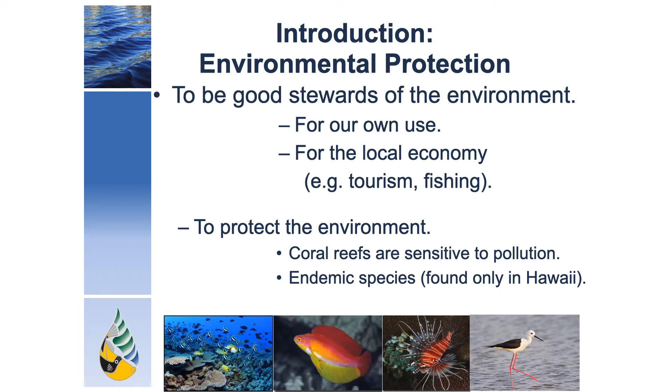Thank you for participating in this training presentation on the State of Hawaii Department of Transportation, Harbors Division, Environmental Construction and Post-Construction Programs. It is important for all of us to ensure best management practices are properly implemented to minimize potential pollutants generated during construction and post-construction activities and prevent them from entering our state waters. Our goal as good stewards is to ensure that our coastal waters are clean for everyone to enjoy. Clean water is of vital importance for our own use as well as to the fishing and tourism industries. Further, it is our responsibility to protect our wildlife, including many species only found here in Hawaii.

Back in November of 2014, the Hawaii Department of Transportation entered into a second consent decree with the Department of Justice, United States Environmental Protection Agency (EPA), and the Hawaii Department of Health due to alleged violations of the Clean Water Act at Honolulu Harbor and Kalaeloa Barbers Point Harbor. Under the consent decree, Harbors Division was required to implement various measures to improve the management of stormwater runoff. In doing so, Harbors created environmental policies and further enhanced their stormwater management program, which is driven by the issued National Pollutant Discharge Elimination System (NPDES) permits.

The Clean Water Act was established in 1972 to create a basic structure for regulating pollutant discharges into waters of the United States. This act gave the EPA the authority to implement pollution control programs, making it unlawful to discharge any pollutants from point sources into navigable waters unless a permit is obtained.

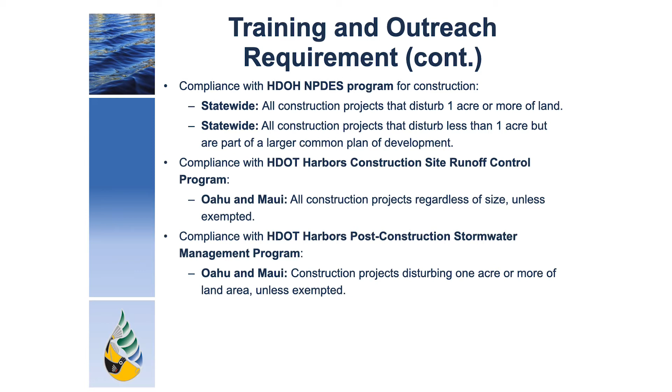This presentation will cover the information necessary to comply with these 3 programs. Outreach to construction contractors and consultants is provided by Harbor's Environmental Section through coordination with the Harbor's project managers, project engineers, or construction engineer as needed.

3 types of informational exchange sessions may be utilized as needed, which include pre-bid meetings, pre-construction meetings, and additional informational exchanges.

Harbors defines construction activities as any activity that disturbs land, which includes but is not limited to clearing, grading, and excavation. The definition of construction activities also includes construction support activities, such as stockpiles, borrow areas, and staging sites.

Land disturbance means the penetration, turning, moving of soil or the resurfacing of pavement with exposure to the base course. This may include construction roads, staging areas, stockpiles, grading, grubbing, and demolition. Please note that this does not include grass cutting or tree trimming.

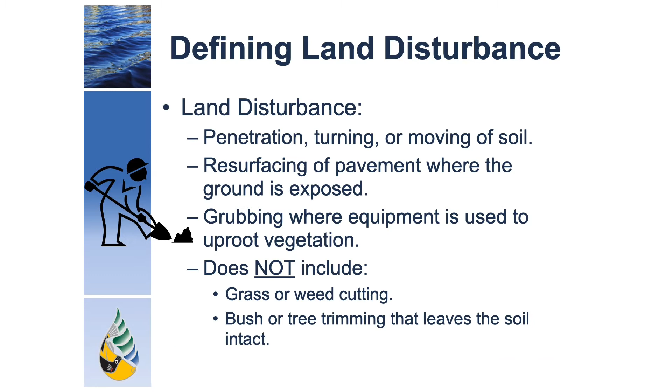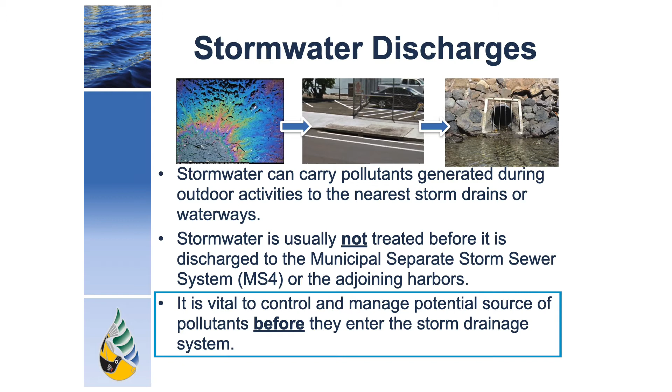How exactly can construction activities potentially impact the environment? Impacts can occur when stormwater runoff carries pollutants from construction sites to nearby storm drains or waterways. Once stormwater has entered the storm drain system, it flows and discharges directly to the adjoining harbors. Thus, it is essential to control and manage potential sources of pollutants before they enter the storm drainage system.

What exactly is an MS4? An MS4 is a system of conveyances that is designed or used for collecting or transporting stormwater and eventually discharges to surface waters. This may include storm drain inlets, manholes, canals, ditches, and outfalls. In Hawaii, anything that enters the MS4 eventually makes its way to our oceans.

It's important to remember that an MS4 is not a combined sewer, which means any pollutants that enter the MS4 are discharged directly to our oceans without prior treatment.

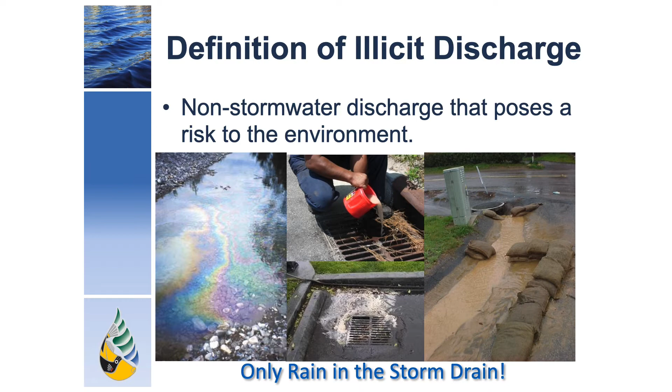One potential source of pollutants is from what is called an illicit discharge. Illicit discharge is any non-stormwater discharge that poses a risk to the environment. An easy way to remember this is that only rain should enter the storm drain. The pictures on this slide provide examples of illicit discharges that should be eliminated.

There are many common pollutants that may be generated on a construction site. Materials and wastes that are stored on site, such as paints and trash, can be spilled or blown into the storm drain system. Wastewater from portable toilets could be released into the environment if not properly anchored and secured. Concrete washouts can significantly impact stormwater runoff by elevating the pH of the water if not properly contained and managed.

Also, it is a common finding that vehicles and equipment often leak on the job site. The petroleum products from these releases are potential pollutants if not properly contained and cleaned up promptly. Other major contributors of potential pollutants on a construction site are stockpiles of aggregate material and exposed dirt because they can be very easily carried away by stormwater runoff if not stored properly.

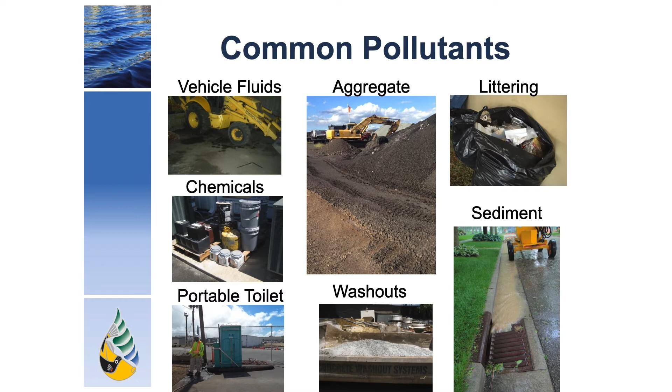Erosion and sedimentation are common concerns at construction sites. Erosion results from the displacement of soil particles due to wind or water runoff. Construction activities, such as grading, may increase erosion if left unprotected. Sedimentation is the movement and settling of suspended soil particles and is a result of erosion. Overall, if erosion can be controlled, then sedimentation will not be a concern.

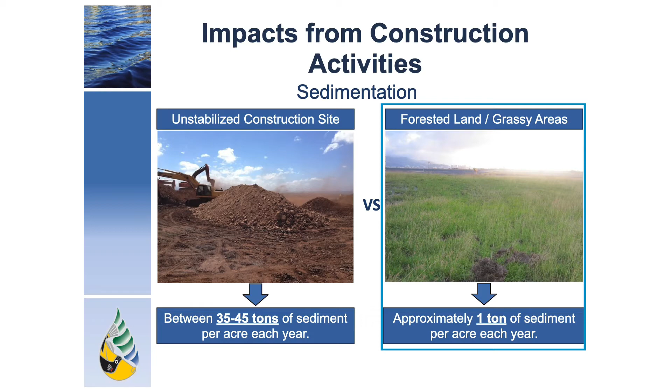Studies have shown that in 1 year, between 35 and 45 tons of sediment per exposed acre can be discharged from an unstabilized construction site. In contrast, a stabilized site discharges only around 1 ton of sediment per acre per year. Sediment is one of the most common pollutants found in our waterways and can cause billions of dollars worth of damage annually. The following are some impacts that sediment may have on stormwater.

Sediment may fill up storm drains and catch basins designed to carry stormwater away from roadways, which may increase the potential for localized flooding.

Excess nutrients from sediment increase algae growth. Sediment causes waters to become turbid, which prevents sunlight from reaching vegetation and coral. It also reduces oxygen levels, which may impact marine life. Sediment can clog fish gills, reducing resistance to disease, lowering growth rates, and affecting fish and egg larva development.

Construction projects may have both short-term and long-term impacts on the environment. Specifically, construction projects often increase impervious areas, such as creating new paved parking lots and buildings. These impervious areas prevent stormwater from infiltrating into the ground and cause increased runoff volume.

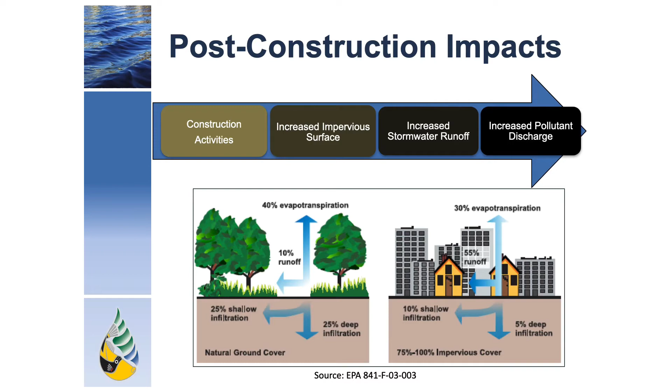To mitigate these impacts, the Harbor's post-construction stormwater management program covers mechanisms and practices to be used at the site to manage and control discharges of potential pollutants and runoff volume after construction activities have been completed. The following slides will further discuss the NPDES program for construction activities.

As previously discussed, the NPDES program is a part of the Federal Clean Water Act, and its overall goal is to regulate the discharge of pollutants from point sources to the receiving waters of the United States. Point source discharges may be from fueling, dewatering, construction, and even those from the storm drain system itself.

The HDOH regulates this program locally and requires permits under Hawaii Administrative Rules Chapter 11-55. Appendix C of the regulation provides information for construction compliance. Again, this is for projects that disturb 1 acre or more, or are part of a larger common plan of development or sale that disturbs 1 acre or more.

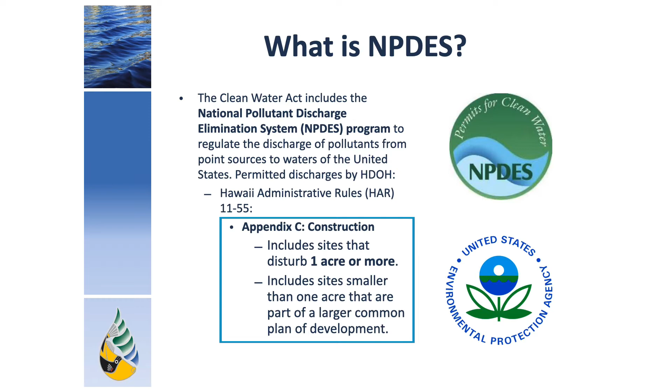The NPDES program for construction sites has several requirements. No later than 30 days prior to the start of construction, a Notice of Intent Form C, or NOIC, with a SWPPP must be submitted to DOH.

After the NPDES permit has been issued by DOH, the contractor must notify HDOH no later than 7 calendar days before the start of construction activities.

All personnel working on the site need to be trained on the best management practices, or BMPs, that will be used and retain all training records. This is to ensure that they know how to determine appropriate BMP measures and properly apply the measures, for example, proper application of a stabilized construction entrance or how to properly install the silt fence.

BMPs should be installed prior to the start of construction and should match the BMPs described in the SWPPP. For example, if the SWPPP includes a silt fence along the perimeter of a site, the contractor cannot just install biosocks along the perimeter unless the SWPPP is updated.

Inspect and maintain all BMPs as needed. The SWPPP is a living document and can be updated as needed. Upon acceptance by Harbor's designated project engineer, the changes must be logged and signed by the owner or its duly authorized representative. Finally, once construction has been completed and disturbed soil has been stabilized, the contractor will submit a notice of cessation to the HDOH.

In accordance with HAR 11-55 Appendix C, the Notice of Intent forms must be submitted via the HDOH e-permitting website.

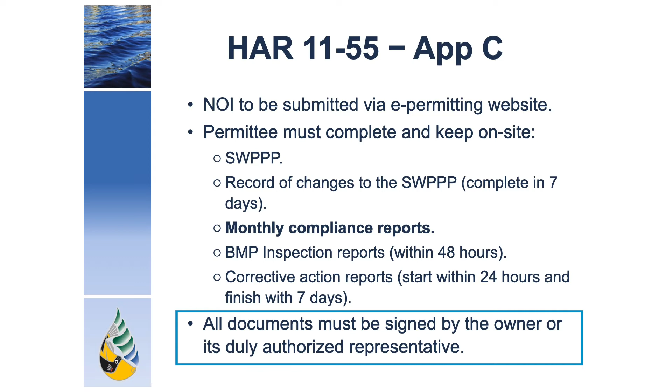A monthly compliance report is required, and should include information required in HAR 11-55 Appendix C and the issued NGPC, any incidences of noncompliance, and corrective actions. The monthly compliance report should be kept on site and be available if requested by an HDOH inspector. All of these documents must be signed by the owner or its duly authorized representative.

HAR 11-55 Appendix C outlines specific requirements to be included in the SWPPP, which includes but is not limited to the following: the stormwater team, including the names or titles of the team members. The stormwater team includes the parties responsible for inspections, corrective actions, training, SWPPP updates, spill response, and any other aspect of stormwater compliance.

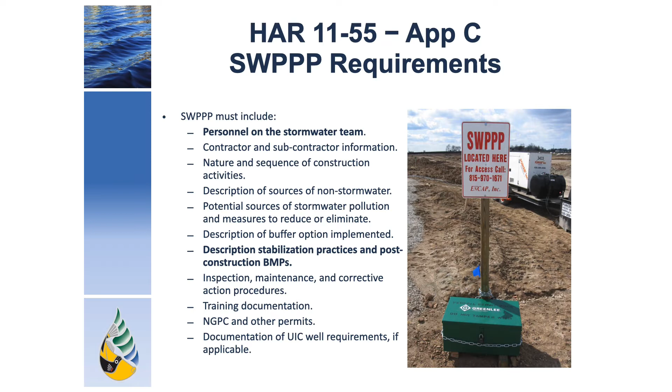A description of final stabilization practices that will be used, such as paving or seeding, as well as a description of post-construction BMPs.

A site map that details the locations of potential pollutants, such as disturbed earth, stockpiles, and staging areas, as well as the locations of all BMP measures used on the site and in the drainage areas, and paths should be included in the SWPPP. A new requirement is to indicate the boundary lines for the buffer area.

The buffer areas are required when ground-disturbing activities occur within 50 feet of state water. The HDOH provides several options for meeting this requirement. If there is sufficient space, the buffer can consist of a 50-foot barrier of undisturbed vegetation delineated with flags or other markings. However, with most harbors projects, there is usually not that much vegetated area available to be used as a buffer.

The second option is to provide a smaller buffer with double sediment control spaced 5 feet apart. An example of this is to place 2 layers of sediment control along the boundary of the project site or state water.

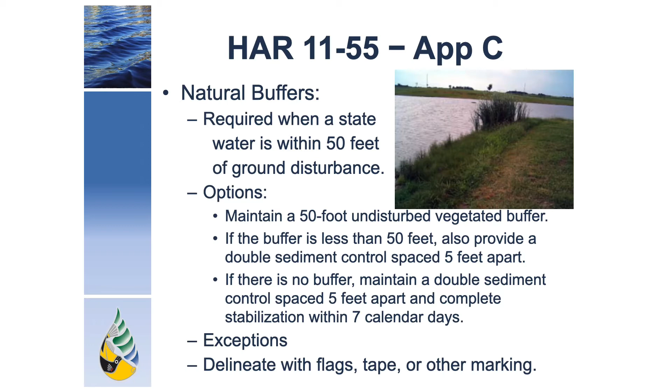A silt fence with a berm holding down the bottom is considered one sediment control, and an additional control will need to be added to achieve compliance. If there's no existing vegetation in the area, a third option is to provide double sediment control, spaced 5 feet apart, with the disturbed ground stabilized within 7 calendar days. If the project qualifies as an exception, this must also be documented in the SWPPP if any of the above scenarios are not feasible.

This needs to be detailed in the SWPPP and discussed with Harbors and the HDOH for other possible solutions. HAR 11-55 Appendix C also details how frequently a contractor must conduct self-inspections of their site.

First, you must determine whether stormwater from the site discharges into an impaired water body. If the water body is listed as impaired, such as at Honolulu Harbor, inspections must be performed once every 7 days and within 24 hours of any rain event of 0.25 inches or more over a 24-hour period. This means the stormwater team must monitor and record daily rain gauge readings on site, or daily monitor the nearest NOAA weather stations available online.

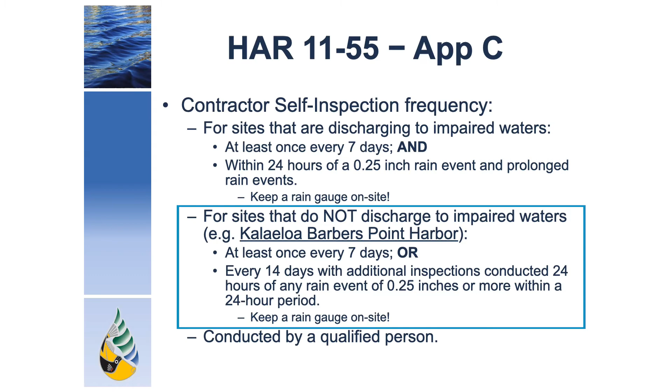If the site is discharging to a non-impaired water body, such as Kalaeloa Barbers Point Harbor, inspections are required to be conducted either weekly or every 14 days, with additional inspections conducted within 24 hours of any rain event of 0.25 inches or more that occurs within a 24-hour period.

HAR 11-55 also has specific requirements for correcting deficiencies or potential violations that could lead to a violation of water quality, such as the breach of a sediment control during a rain event. The deficiency is required to be corrected immediately, within the same day that it is observed. If the deficiency cannot be corrected immediately, the reasons for the delay must be documented and the anticipated time frame for the correction must be fully described.

If significant repairs are required, this time frame can be extended to 7 days. Also, you will need to complete a corrective action report within 7 calendar days from the time of discovery, summarizing the identified deficiency and the corrective actions that were taken.

The HDOH requires stabilization measures to be implemented immediately whenever earth-disturbing activities have stopped. Even if the work has only stopped temporarily for more than 14 calendar days, stabilization must commence. This could include paving the area, providing cover, or even seeding. Stabilization must be completed within 14 days after it has been initiated.

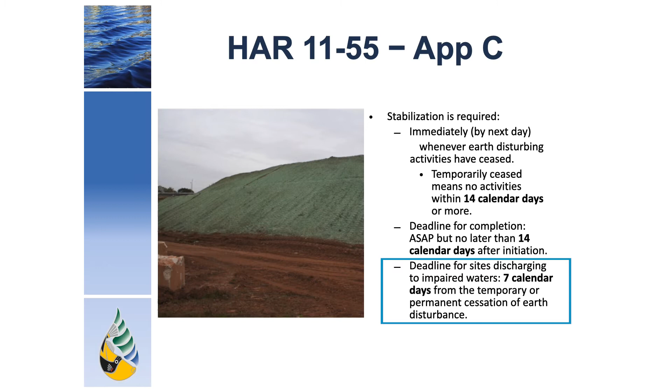But if the work is near an impaired water body, such as Honolulu Harbor, it must be completed within 7 calendar days. Any circumstance that prevents the project from meeting these deadlines should be documented. The timeframes for stabilization do not mean that the seed has to grow within 7 calendar days, but the steps should be taken to stabilize. These steps can include prepping the soil for vegetation, applying mulch, seeding, or even making arrangements for stabilization.

To achieve final stabilization, which is required prior to terminating the NPDES permit, vegetation must provide 70% or more of the density that was previously there. For non-vegetative controls, paving needs to be completed.

A pre-design meeting will be held to discuss the construction site design review checklist and permanent post-construction BMP plan checklist, if applicable for the project. Keep in mind that this meeting is optional for improvement projects owned and managed by Harbors tenants. All permits and applicable Harbors checklists should be completed by the designer. This includes a checklist for construction design and post-construction design, along with a post-construction stormwater mitigation plan, or PSMP.

Once these documents have been received by the Harbors environmental section, they will be reviewed to ensure that all environmental requirements have been addressed. The consent decree lists specific requirements for construction activities occurring around commercial harbors on the island of Oahu, which includes a review of project proposal, specifications, plans and drawings, construction submittals, BMP plans, and the design review checklist by Harbors' respective sections. All Harbors personnel assigned to review plans and conduct inspections will receive specialized training.

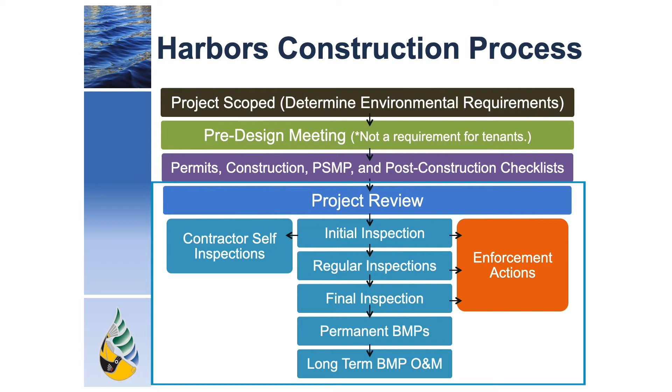If any deficiency or potential violation is identified during the inspections, the harbor's enforcement process will commence. After construction is completed, a final inspection will be conducted at the site to ensure that the project has been fully stabilized and all required post-construction BMPs are in place. Finally, post-construction BMPs will be maintained for the life of the device as recommended by the manufacturer or designer. More details will be discussed later on.

The design review process may start with a pre-design meeting. During design review, designers may confer with engineering branch personnel in regard to required permits, BMP requirements, and other matters. The designer must then complete a design that addresses environmental requirements when applicable. Documentation of that compliance must be provided to Harbor's environmental section for review. For non-exempt projects less than 1 acre, the designer must complete the notification form for less than 1 acre.

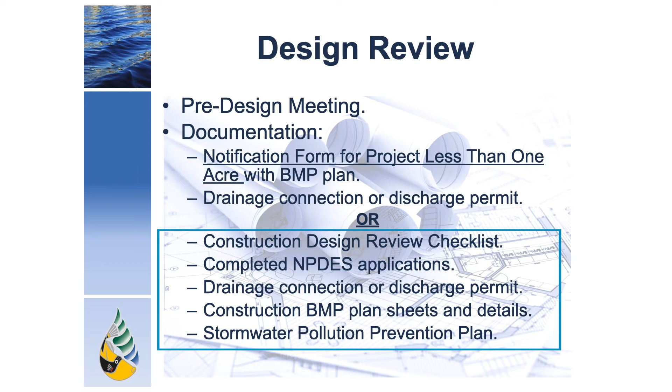Additionally, for projects owned and managed by Harbor's tenant, if the design involves connecting to or discharging into the Harbor's drainage system, then a permit application to connect or discharge must be submitted to the Harbor's environmental section for review and acceptance. For sites that are 1 acre or larger, the construction design review checklist is required, as well as completed applications for NPDES permits, and again, Harbor's drainage connection or discharge permit for project owned and managed by Harbor's tenant if applicable. The submittal should also include the construction plans and SWPPP.

Harbors has exempted certain types of projects from the program that have been shown to have minimal impacts on the environment. These categories include minor land disturbance activities, such as minor landscaping activities and interior improvements, post, pole, sign, and fencing installation, utility repair work, parking lot, driveway, and other paved surface repairs, and other repair and maintenance activities with no or minor land disturbance. These types of projects are usually exempt from document review and Harbor's construction site runoff control BMP inspections.

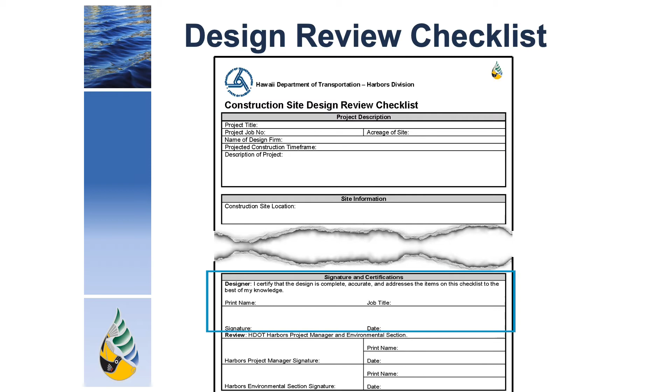This is the construction site design review checklist, which is available on the Harbor's website. It includes a general description of the project location, and size of disturbed area. It also includes a list of items that may need to be included in the Stormwater Pollution Prevention Plan, or SWPPP. Designers simply need to check yes, no, or not applicable for each item and sign the form. The review will be considered accepted when the Harbor's environmental section has signed the form.

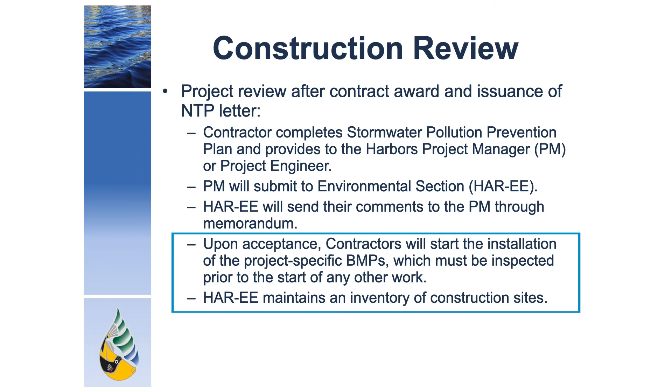Following the completion of design phase, the project will then go out for bid through public solicitation. Upon selection, issuance of an award letter and a notice to proceed, or NTP letter, the construction contractor would then work on updating and finalizing the SWPPP based upon their specific information and construction means and methods. The revised SWPPP shall be submitted to the Harbor's project manager or project engineer, who will then provide the SWPPP document to the Harbor's environmental section for review. Once accepted, the contractor can commence installation of BMP measures, which must be inspected and deemed sufficient before any other construction activities are allowed to commence on the site.

When conducting a BMP plan review, reviewers will need to get a complete understanding of what is involved in the project. This could include the location and size of the project, where stormwater will flow, and potential pollutants. As previously discussed, potential pollutants on a construction site are typically associated with land disturbance, stockpiles, staging areas, and non-stormwater discharges. Reviewers should take a look at the schedule. To minimize the discharge of potential pollutants, it is best to conduct construction activities during the dry season, which is typically from April to September.

It is important for both the reviewer and the contractor to look for ways that can minimize the amount of disturbed area on a site. This could be accomplished through phasing the project so that smaller areas are disturbed and stabilized before moving to different areas of the project. The reviewer will also ensure that the SWPPP is complete, in particular that the stormwater team has been named and responsibilities identified.

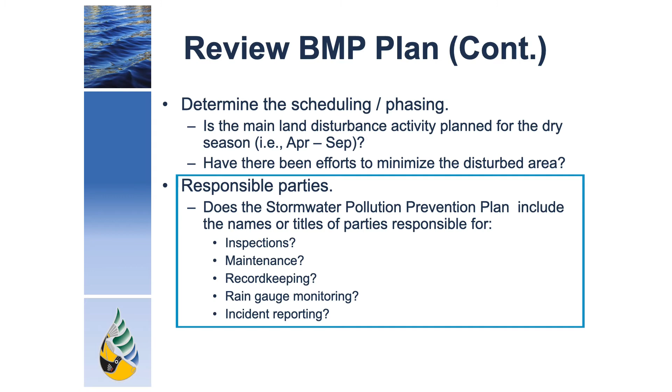Reviewers will also ensure that potential stormwater pollution has been addressed using the technology that is economically practicable and achievable in light of best industry practices. This basically ensures that the BMPs selected for the site will be effective. The plans should also include a method for final stabilization, such as hardscaping or landscaping. The reviewers will ensure that, for projects that are 1 acre or more, permanent BMPs with ongoing maintenance plans are included. Finally, the reviewer will ensure that the necessary permits have been applied for.

In particular, projects that disturb 1 acre or more of land must obtain an NPDES permit for construction, and projects that will have dewatering operations ending and discharging to adjacent state waters must obtain an NPDES permit. There may also be permit requirements for working in water bodies from the United States Army Corps of Engineers. These permits should have been taken into consideration during the project's design phase.

Designers must determine which permits are required, and reviewers verify. When applicable, projects owned and managed by Harbor's tenant may need to obtain a city and county building or grading permit. If a project disturbs 1 acre or more and requires an NPDES permit, the reviewer will ensure that the SWPPP meets the requirements of Hawaii Administrative Rules 11-55 Appendix C and the Harbor Stormwater Management Program.

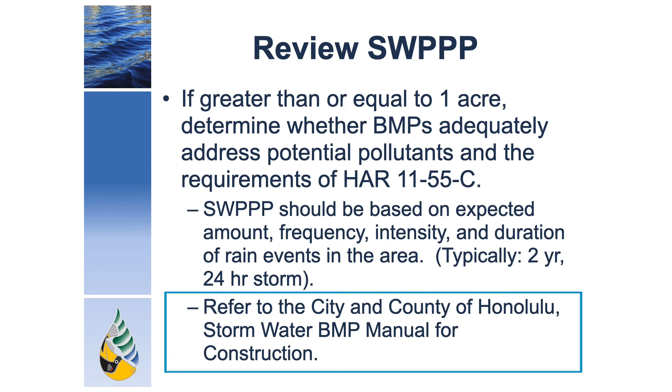Typically, the SWPPP should be able to withstand a 2-year, 24-hour storm event without being damaged or needing to be removed for safety concerns. For more design details, please refer to the City and County of Honolulu Stormwater Best Management Practice Manual.

For construction, BMPs are required to be implemented during construction activities in order to minimize impact to the environment by managing and controlling potential pollutants at their source. BMPs are a structural device or system, or a procedural practice, used to mitigate the discharge of potential stormwater pollutants. An example of a procedural practice includes sweeping, cleaning up a spill, or picking up trash, while a structural device may include a stabilized construction entrance or a storm drain inlet protection.

It is important to remember that drain inlet protection should be your last line of defense for the MS4. Additional BMPs should be implemented to assist in preventing an illicit discharge from occurring.

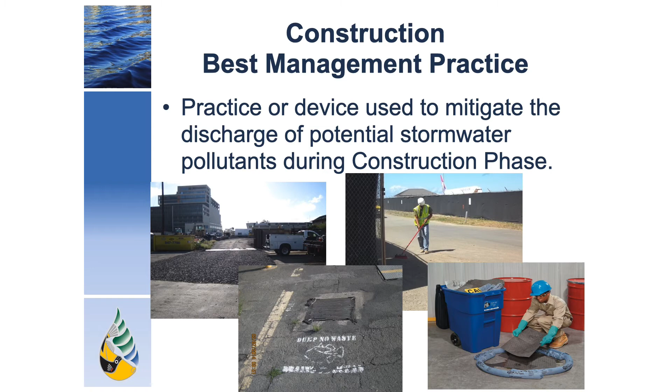As required by the consent decree, Harbors has adopted the City and County of Honolulu BMP Manual for Construction, which provides information about the design details that should be followed. The BMPs listed here should be incorporated for all projects regardless of size when applicable. The consent decree also includes a list of BMPs to be included on projects that disturb 1 acre or more.

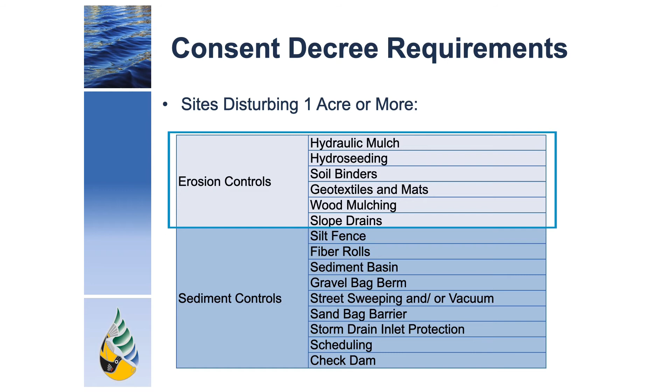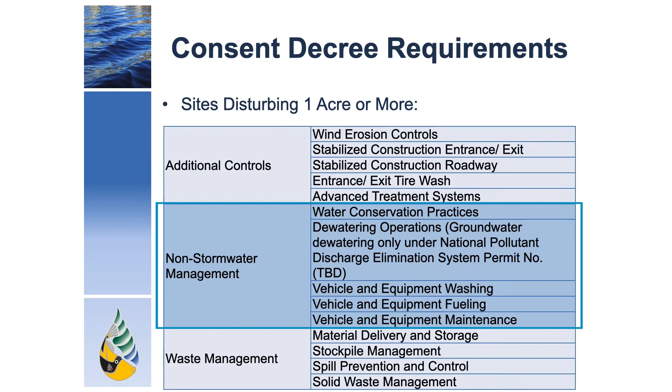These categories include erosion control BMPs, sediment control BMPs, additional control BMP measures such as wind erosion, ingress and egress, and advanced treatment systems, non-stormwater management BMPs, and waste management BMPs.

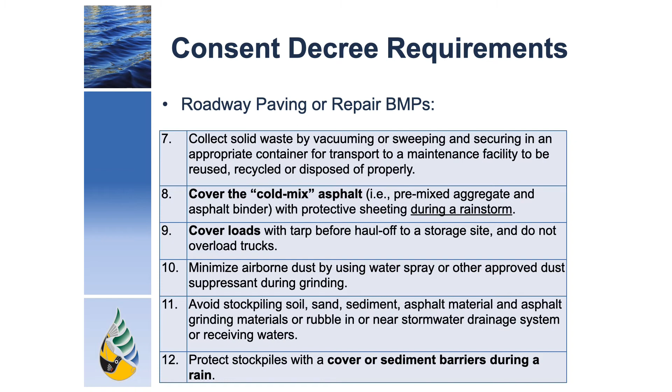Additionally, for paving operations, asphalt and sediment stockpiles should be covered when rain events are forecasted. Truckloads should also be covered when leaving the site to ensure that material will not discharge in the wind.

In addition to consent decree requirements, reviewers will ensure that NPDES permit requirements have been addressed. Minimum measures include ensuring that a buffer or alternative is included if the site is within 50 feet of a state water. Perimeter controls must be implemented wherever stormwater may potentially discharge from the site.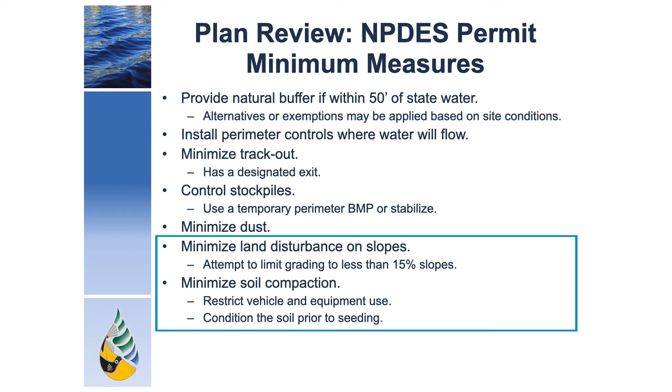There must be BMPs in place to minimize the track-out of sediment onto off-site streets, other paved areas, and sidewalks. Stockpiles and dust must be properly controlled. Also, where possible, work on steep slopes and soil compaction should be minimized. Storm drain inlets should be protected.

A specific plan should be made for contaminated soil that includes placing it on an impermeable liner and covering it to minimize its contact with stormwater. Non-stormwater activities such as vehicle washing and concrete washout should be properly contained and managed. The plan should also include a written narrative of procedures for activities such as fueling, painting, and storage of materials.

Here is an example of a plan review excerpt. It includes a stabilized construction entrance to prevent tracking. The drain inlets will have BMP protection. A dust barrier and silt fence are implemented along the site's perimeter. Also, there is a designated staging area with specific locations for construction waste, stockpiles, hazardous waste, and concrete washout. As such, the BMPs for this construction site appear sufficient.

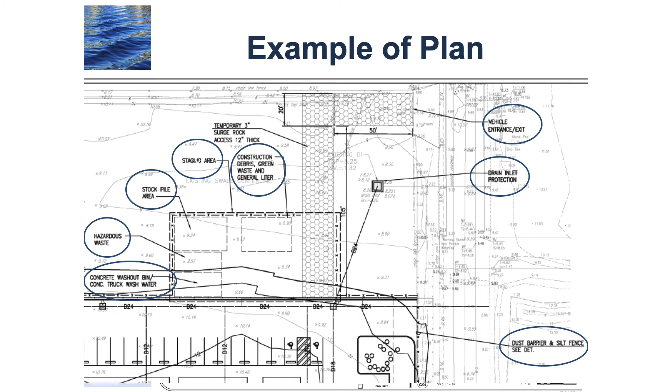Next, we will discuss stormwater BMP inspections, which will be conducted by Harbor's qualified inspectors, as well as expectations of a site while active construction is ongoing. The Harbor's Stormwater Management Program requires inspections of non-exempt construction sites. This is conducted to identify potential or active discharges of pollutants and ensure issues are corrected to stay in compliance and to avoid being fined by a regulatory agency.

The initial inspection will be conducted by a qualified inspector after applicable site BMPs have been installed. Any deficiencies or potential violations noted during this inspection must be corrected before the contractor can commence any further construction activities. Once construction work has commenced, Harbors will conduct regular inspections for the duration of the project.

These will occur every 2 weeks in the wet season, which is October through March, and every 2 months from April to September during the dry season. Deficiencies and potential violations noted during regular inspections may lead to enforcement actions if not promptly corrected. A copy of the inspection report will be provided to the contractor within 5 calendar days. A final inspection will occur once construction work is completed and the site is permanently stabilized.

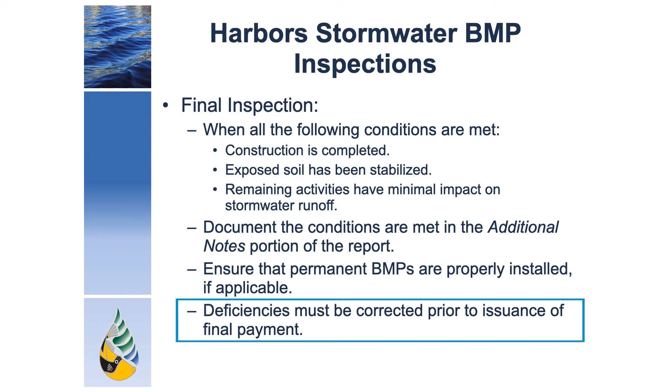Remaining activities will have a minimal effect on stormwater runoff. These conditions will be described in the additional notes portion of the inspection report. At the same time, this inspection will serve to ensure that permanent BMPs are properly installed. Deficiencies and potential violations noted during the final inspection must be corrected prior to closing of the project.

Final payment will be withheld until all corrective actions are completed. The initial, regular, and final inspections discussed in previous slides are a part of the Harbor's stormwater management program and are conducted in addition to what may be required of the contractor.

Contractors shall regularly inspect the condition of the work site. If an NPDES permit has been issued for the site, then documented inspections must be done in accordance with your permit requirements. These contractor self-inspection records must be signed by the duly authorized representative, and the Harbor's inspectors will review the records during their inspections.

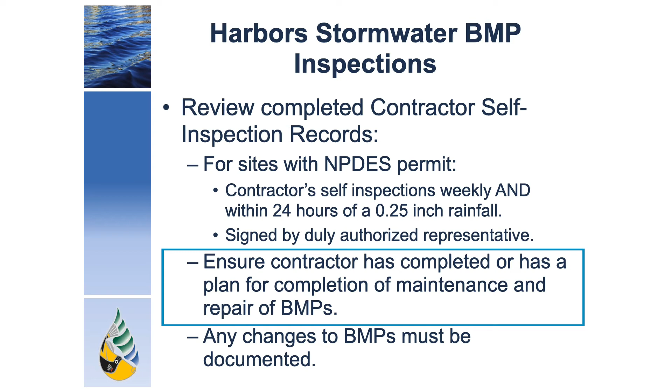Any changes to the BMPs must be documented. Harbor's inspectors will prepare for an inspection prior to arriving at a construction site by doing the following.

1. Review background data such as the plan review, permits, SWPPP, Harbor's drainage map, past inspections, and any past enforcement. 2. Understand the site drainage pattern, including the receiving water and storm drain locations, as this is where potential illicit discharges could occur. 3. Identify all BMPs used on the site and coordinate with the contractor in regard to special safety or scheduling concerns. The following items are required in order to conduct inspections at a construction site.

1. The Harbor's construction inspection checklist should be used to document all inspections, and a notebook may be used for notes. Further discussion of the checklist will be addressed in the next few slides.

In addition, a map that includes all storm drain connections should be used during the inspection to identify locations of drain inlets to be inspected. A TWIC badge is required to gain access to areas of the harbor and should be worn at all times during the inspection. Safety gear is important at construction sites, and the contractor may require additional precautions based on site activities.

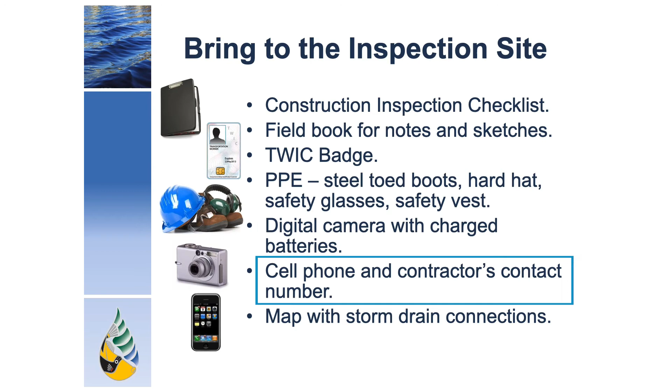In general, inspectors should wear steel-toed boots, hard hats, safety glasses, and safety vests. A camera is also needed to document site conditions. A cell phone with the contractor's number. The construction inspection checklist is available in the Harbor's Construction Site Runoff Control Manual.

After the inspection, the completed checklist will be emailed or otherwise provided to the Harbor's project manager or engineer, Harbor's environmental section, and the contractor. The inspector should also retain a copy.

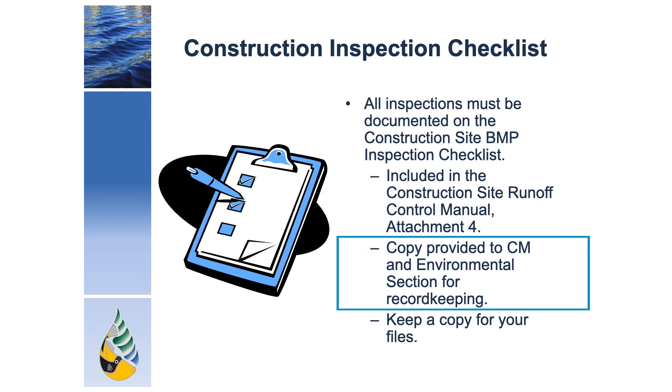The first part of the checklist describes some common activities which may cause stormwater pollution. The inspector must indicate whether BMPs have been implemented to manage and control these potential pollutants and whether that BMP needs maintenance. For example, number 2 asks about storm drain inlet protection.

If the inspector noted that storm drain inlets were fitted with filter fabric, then they would check yes under the column for control device. If that filter fabric had rips, then the inspector would check yes under the require maintenance column. The second page of the checklist includes information about the site's permanent BMPs and a place for additional notes about the site.

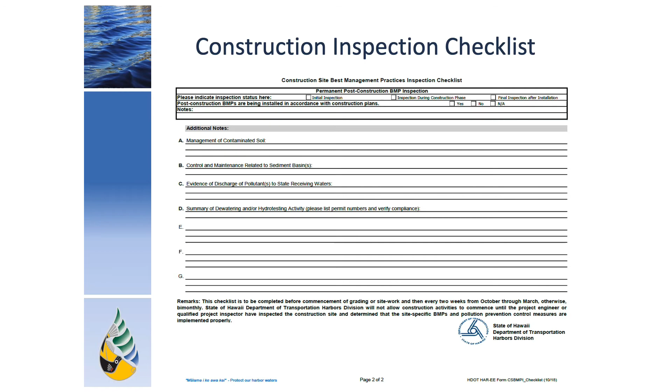In particular, the inspector should ensure that there are no illicit discharges to state waters and document that in Item C. When arriving on site, the inspector will check in with the contractor for safety reasons.

A pre-inspection meeting will be conducted with the contractor and documentation items will be reviewed. The documents that should be on site include permits, employee training records, contractor self-inspection reports, and any associated corrective action reports, a monthly compliance report for sites with NPDES general coverage, and an updated SWPPP.

Following the pre-inspection meeting, the inspector should walk around the construction site to verify that BMPs in the SWPPP match what is present in the field. The inspector should know whether these BMPs are sufficient in controlling pollutants. Particular heed should be paid to storm drains, canals, the harbor, and the site perimeter.

This is also a good time to ask workers in the area some general questions about the BMPs. For example, if the team is inspecting the silt fence, the inspector may ask the construction worker how he installed the silt fence. The answer will inform the inspector about whether the worker has been trained properly.

The following slides will discuss common findings identified during inspections and will present solutions for correction. Remember that correcting a finding may vary from site to site depending on the conditions, materials, and resources available. It is important for everyone to be aware of the site-specific BMPs and relevant requirements for continued maintenance.

The updated BMP plan must be available on site. The plan is the basis for how our regulator will evaluate the site and identifies which BMPs should be present on the site.

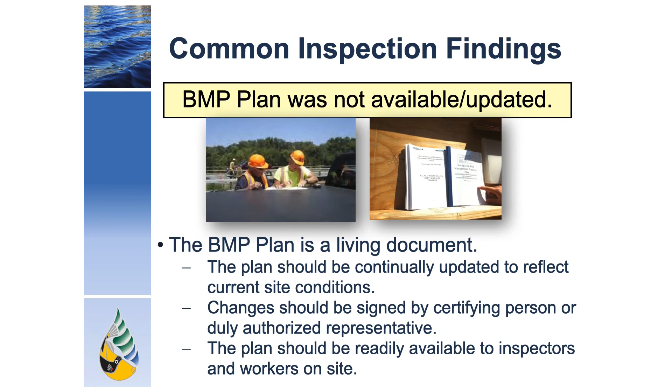Another common issue relates to construction site entrances. The tracking of sediment onto the adjacent public road is something that is easily visible both to inspectors and the public, and can easily be carried into a nearby storm drain by stormwater runoff if not cleaned up promptly. Therefore, it is important that construction entrances have proper BMPs installed or implemented to remove sediment from vehicle tires prior to exiting onto the adjoining street.

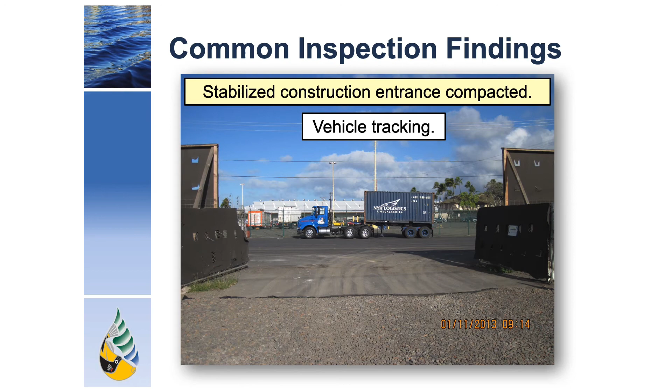As previously mentioned, a stabilized construction entrance prevents tracking. Specific details for stabilized construction entrances are included in the City and County of Honolulu BMP Manual under TC-1. In general, the entrance should be a minimum of 50 by 30 feet and covered with 3 to 6 inch diameter aggregate over geotextile fabric.

Maintenance may need to be conducted regularly throughout the life of the project to remove accumulated sediment and keep the aggregate from settling. If tracking persists, additional BMPs can be implemented, such as regular street sweeping, washing vehicle tires as long as the wash water is properly contained on the site, and stabilizing the source of sediment.

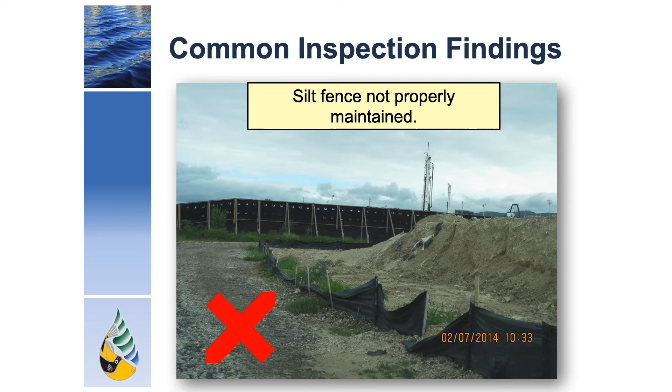Silt fences can be used to control sediment throughout a construction site. However, they must be properly installed and maintained. If not well maintained, sediment may be carried off-site and result in an illicit discharge.

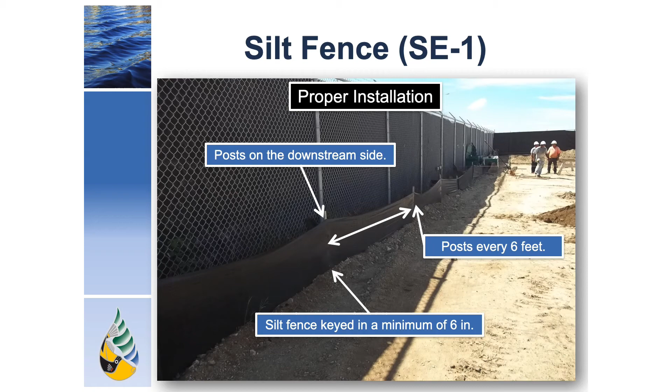Silt fence should be properly installed and maintained by setting the posts on the downstream side of the fence every 6 to 8 feet. The fabric should be stretched tight, and the fence should be embedded in the ground approximately 6 inches to secure the bottom of the fence. The goal of a silt fence is to hold sediment-laden water while promoting sedimentation behind the fence.

There are other products, such as filter fabric, that will let the runoff pass through. However, the silt fence is designed to keep that water and any associated pollutants on site.

To aid in achieving this goal, proper installation should include properly joining segments of the silt fence. This can be accomplished either by twisting the two ends together or by overlapping them. Additionally, the ends of the silt fence should be placed in a J-hook pattern to prevent the stormwater from flowing around the fence. Maintenance will be required for accumulated sediment on the silt fence when it has reached a third the height of the barrier.

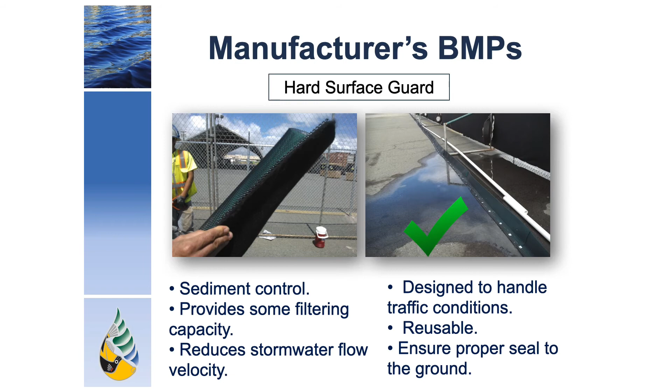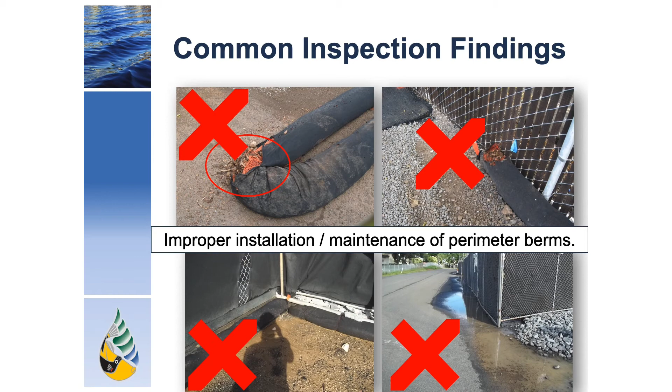Additionally, it is important to ensure that perimeter berms are properly maintained. The pictures at the top show how compost berms can actually contribute pollutants if not maintained. Contractors should follow the City and County of Honolulu BMP Manual SE16 when using compost socks or berms on site.

In particular, the berm must be filled and placed on level ground. The ends of the socks must overlap a minimum of 6 inches, and the end of the berm should be turned up the slope to aid in containing sediment. Accumulated sediment must be removed when it reaches a third the height of the berm.

Additionally, berms are often ripped or damaged due to normal wear and tear. Contractors should be mindful of this when conducting self-inspections and replace damaged segments.

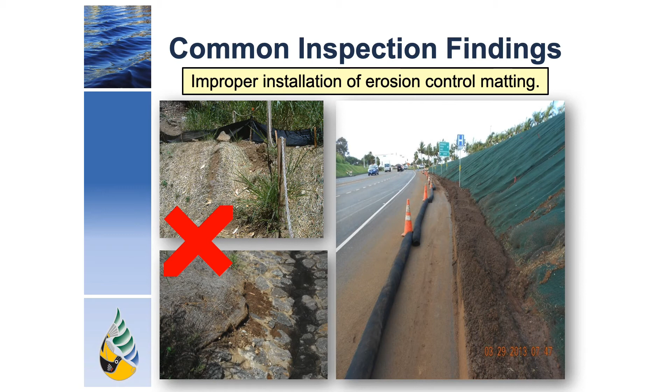Erosion control matting can be used on a site to stabilize disturbed soil until vegetation can be established. However, the matting must be installed properly. Geotextiles must have full contact with the ground surface in order to be truly effective. This may require the removal of larger rocks and obstructions and leveling off the ground.

The mat must also be properly anchored. This involves trenching in the mat at least 6 inches at the top of the slope, overlapping sections of the mat by 2 to 3 inches, and stapling the mat every 3 feet.

Filter fabric can be used to protect storm drain inlets from potential runoff pollutants. This should be used as a last line of defense after properly containing potential pollutants at the source.

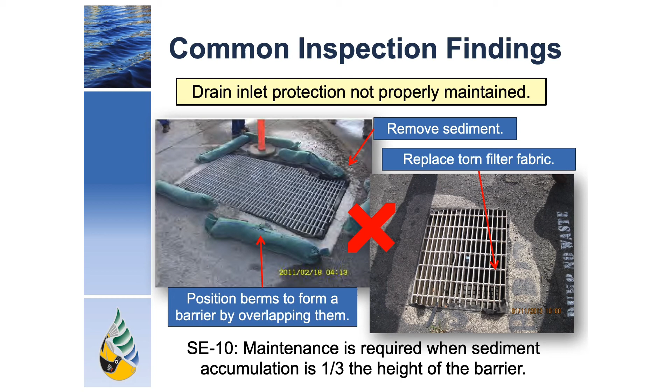A common finding during inspections is that the inlet filter fabric has not been maintained. Contractors should be conducting frequent inspections to ensure that torn filter fabric is replaced and accumulated debris is removed.

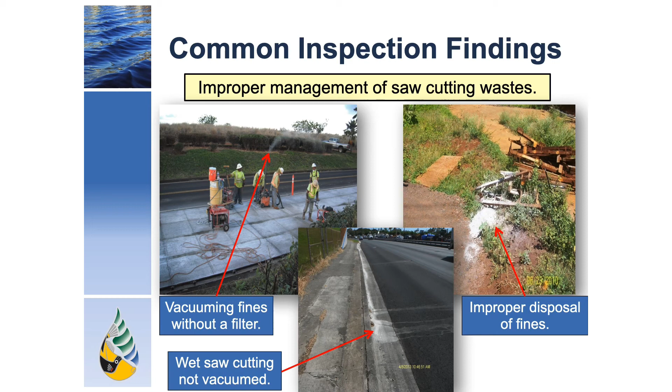Saw cutting of concrete will generate fine materials or dust that are easily carried away in stormwater runoff. In this instance, construction workers were conducting saw cutting operations without a vacuum to collect the fine material for proper disposal. Slurry created during saw cutting must be vacuumed to remove it from the site, and should be handled in a similar manner to concrete washout.

New concrete structures and slabs on a construction site always result in the need for washing equipment involved in the placement of the concrete. The improper management and handling of the waters used to wash this equipment can generate stormwater pollutants. This may occur if the containment device is not structurally sound or is too full.

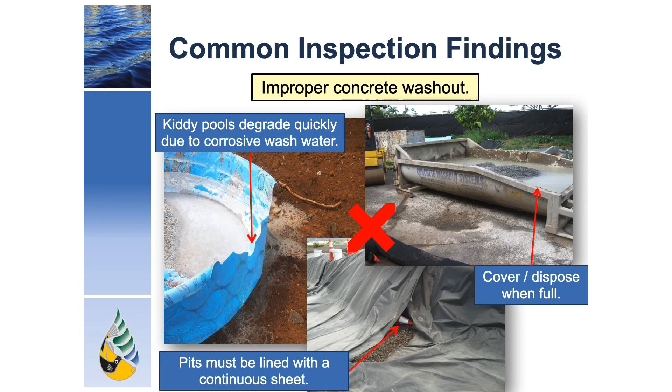If an in-ground pit is used for the washout, it must be lined with one continuous sheet of plastic, as the overlaps between multiple sheets may result in discharge of the wastewater. Concrete residue is a fine material that can easily discharge into runoff, which will not only contain solids, but also change the pH of the receiving water.

All concrete washwater must be properly contained. This can be accomplished by designating a container on site and removing the debris once the water has evaporated. Additionally, a cover may need to be added over the container when rain is forecasted to prevent the wastewater from overflowing. It is important to note that containment may only be filled up to 75% capacity before disposal is required.

Temporary concrete washout facilities should be maintained to provide adequate holding capacity with a minimum freeboard of 4 inches for above-grade facilities and 12 inches for below-grade facilities.

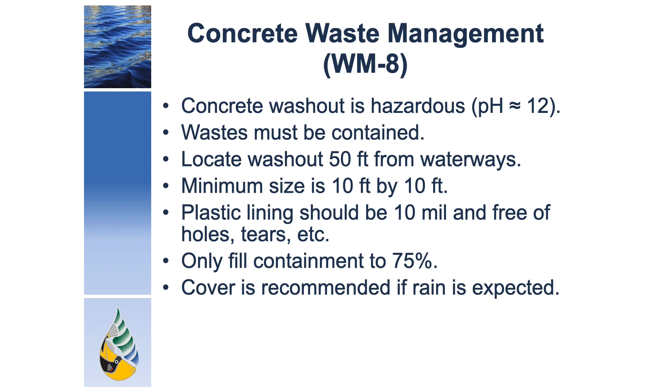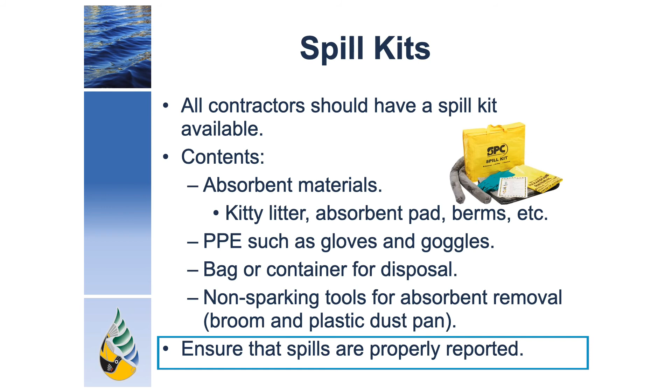Spill kits should include personal protective equipment, a plastic bag or other container for disposal, non-sparking tools such as a broom, and absorbent. The absorbent may be items such as berms, pads, or clay granules. Spills should be immediately reported to Harbor's project manager or project engineer, who will then notify Harbor's environmental section.

Stockpiles of aggregate material must be properly contained if they are to be stored for more than one day. Additionally, stockpiles should be positioned away from waterways, such as drainage swales, storm drains, streams, or the ocean, to prevent the material from being carried away by stormwater discharge.

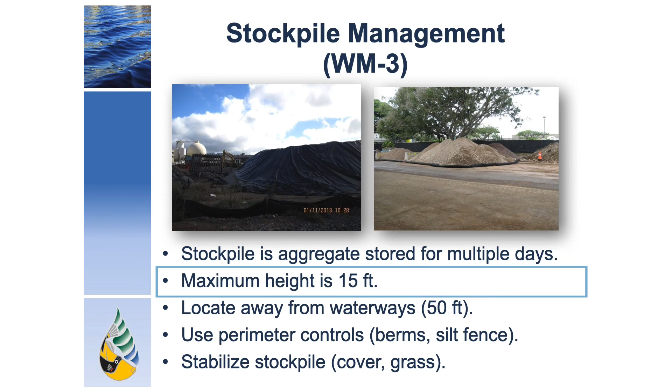There are several ways to contain aggregate material stored on site. The stockpile could be covered, vegetated, or surrounded by a BMP device. These devices may include berms or silt fences to effectively contain the stockpiled material. The stockpile should not be higher than 15 feet to prevent excess generation of dust.

Improper disposal of paint waste and painting equipment cleanout can introduce pollutants to the stormwater. Ensure that drips are contained by using tarps or another device when painting. Store paint within secondary containment. When painting operations are complete, ensure that equipment is cleaned properly.

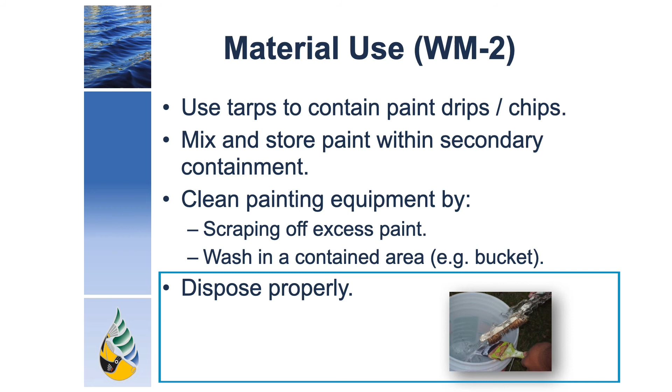This includes scraping off the excess paint back into the paint can and washing the brush or other painting tools into a container such as a bucket. The bucket and remaining water-based paint can be allowed to dry, and the remaining debris should be disposed of as solid waste. Hazardous materials must be stored properly on site.

In particular, 55-gallon drums and larger of liquid materials require secondary containment. Containers should be inspected to ensure that they are in good condition and properly labeled. It is preferred that materials be stored in a covered area to prevent interaction with stormwater.

However, if a container must be stored outdoors, keep it at an angle to reduce the ponding of water on top of the container. This will minimize rusting and possible container breaches. Also, materials should be stored on pallets so they are not impacted by stormwater runoff.

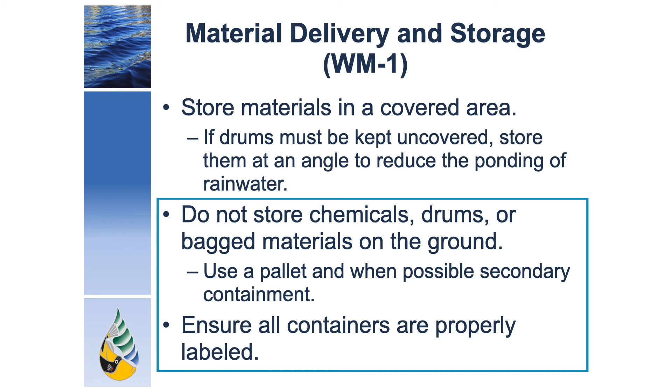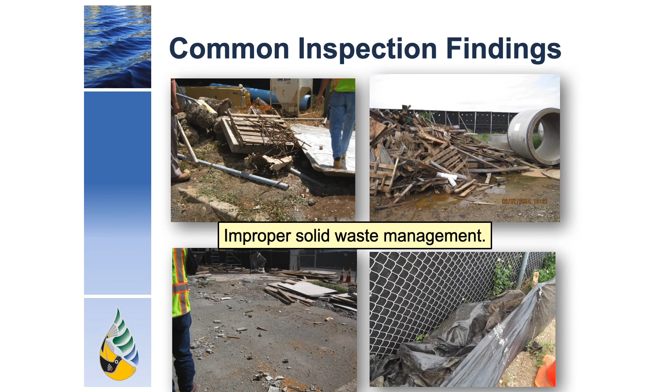Shown on this slide are some common findings related to good housekeeping and proper waste management. Trash and debris throughout the site can be picked up by stormwater and carried to harbor waters. Make it a regular practice at your site to clean up debris at the end of each working day.

Frequent sweeping of paved areas aids in removing sediment and debris. Solid waste containers should be covered and located 50 feet from waterways to prevent stormwater from impacting the wastes, and wastes should be removed from the site regularly. Contractors should separate wastes that may be hazardous from the other solid waste items and manage them properly.

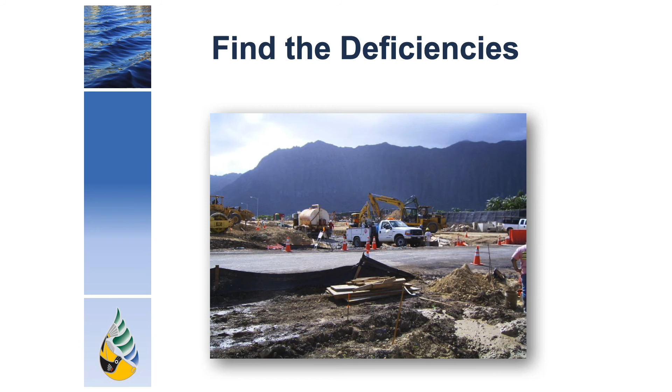Here is an example of a construction site with several deficiencies. Inspectors should ensure that these are documented on the inspection checklist, and contractors should ensure that corrective actions are taken. In particular, there is a track out on the road with no apparent stabilized construction entrance. Furthermore, the silt fence has not been properly installed or maintained since the supporting posts are not on the downstream side, and it has partially collapsed. A stockpile on site has not been contained, and the concrete washout appears to have overflowed.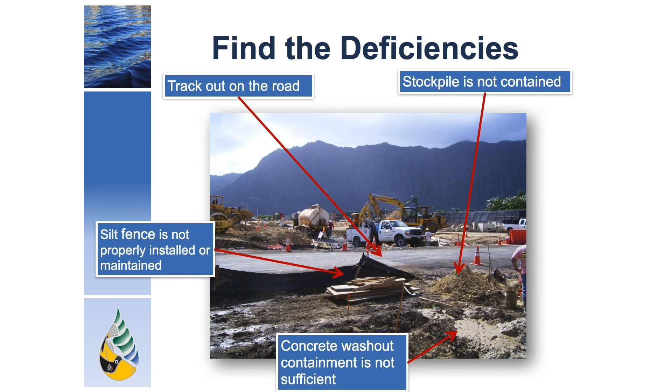Once the site inspection has been completed, all the findings should be verbally communicated to the contractor prior to leaving the site. This will allow the contractor to begin making corrections and establish goals for corrective action completion, even before receiving the formal inspection report. The inspector should clarify whether the contractor can email the photos of the corrections or if a reinspection is required.

The inspector will present a written record of findings noted by completing the construction inspection checklist. Inspectors should also include photographs to support statements of finding. The checklist should only include a thorough explanation of site observations. If the contractor requests more information about how to address these findings, that may be provided verbally. In the event of a disagreement, inspectors must remain professional and provide a formal letter with documentation of the finding.

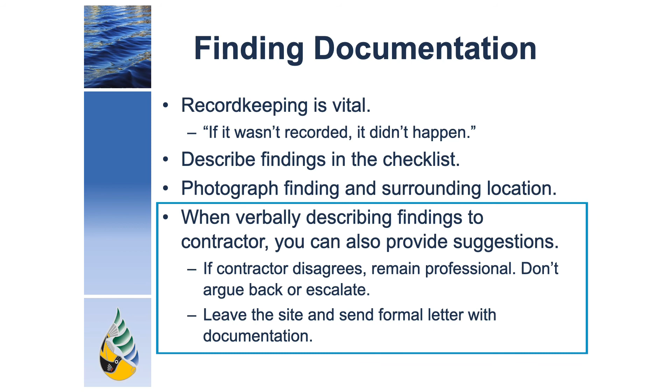Upon return to the office, the inspector will complete and sign the inspection checklist. The signature page should be scanned and compiled into a full report with the photos and a map of photograph locations if necessary. The report should be sent to Harbor's project manager or engineer, environmental section, and the contractor as deemed necessary. The inspector should then note in their calendar to ensure follow-up is completed.

Throughout the construction process, enforcement actions can be implemented where necessary to ensure corrective actions are completed. Enforcement will only be conducted by Harbor's qualified personnel who has internal enforcement authority. Enforcement will reference Harbor's SWMP, the construction contract, the Hawaii Revised Statutes, and the Hawaii Administrative Rules. When deficiencies have been identified and enforcement becomes necessary, an inspector will verbally communicate their findings to the contractor to allow the contractor to begin corrective actions immediately.

If the contractor has not made the necessary corrective actions, escalating enforcement may be required. This may include a written warning via inspection report from PM or a formal letter from Harbor's engineering program manager. It could also include a notice of apparent violation, or NAV, from Harbor's deputy director. If the written warning does not produce the necessary results, a stop work order may be issued by Harbor's engineering program manager. Harbor's division may also consider withholding payment and assessing environmental liquidated damages when necessary. The last resort would be terminating the contract by the Director of Transportation.

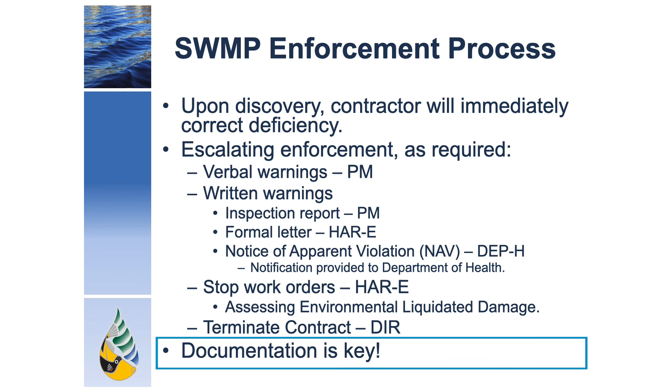An extremely important part of this process is documentation. Inspectors may be asked to present their inspection reports or written warnings in order to determine the next level of enforcement needed. Once a regulatory agency, such as the HDOH, begins enforcement, there may be specific penalties associated with each violation that are compounded each day the violation occurred. The potential for penalties shown on this slide can be avoided if all parties working on construction projects follow the requirements in Harbor's construction program and apply the appropriate BMPs.

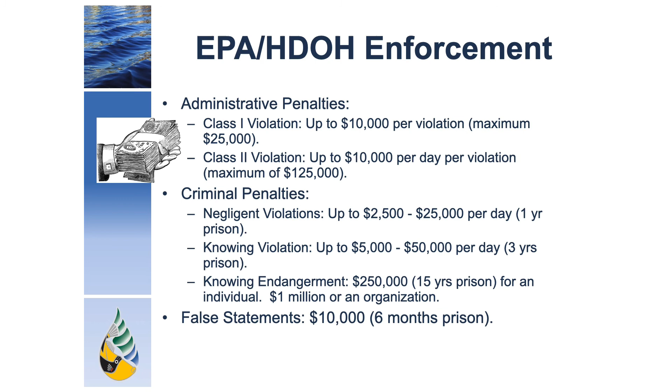The post-construction program is considered complementary to Harbor's construction site runoff control program. This section will discuss requirements while providing guidance for project-specific planning, selection, and design of post-construction BMPs to fulfill Harbor's NPDES permit requirements.

Post-construction BMPs are vital because they will continue to address potential stormwater pollutants long after a construction project has been completed. For example, if a construction project is for a parking lot, a green parking BMP, such as porous pavers or a central grassy swale to provide filtration for runoff from paved areas, are considered permanent BMPs. They will reduce runoff quantity and will also assist with reduced pollutant loads such as oil leaks from parked vehicles. Please note that if you do include a post-construction BMP, there must be an operation and maintenance plan to ensure that it continues to function effectively for the life of the system.

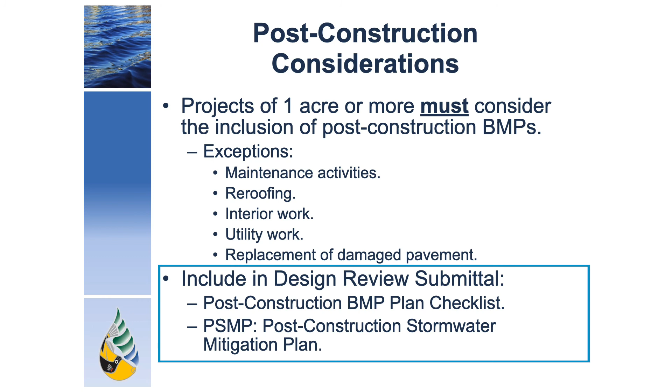Post-construction BMPs must be considered and evaluated with projects disturbing land of 1 acre or more. There are some exceptions which include maintenance activities, re-roofing, interior work, utility work, and replacement of damaged pavement. Designers should submit the permanent post-construction BMP plan checklist and a post-construction stormwater mitigation plan, or PSMP, to Harbor's environmental section for review.

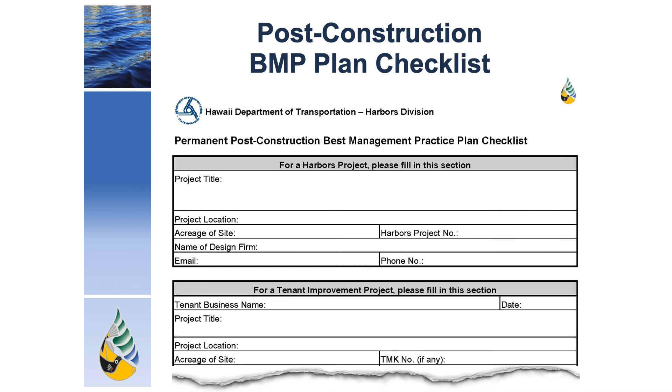The permanent post-construction BMP plan checklist includes general information about the project and then asks to describe the type of pollutant control strategy selected. This could include low-impact development, source control, and/or treatment control.

The Post-Construction Stormwater Mitigation Plan, or PSMP, begins by completing or locating an existing drainage study of the area. The designer then identifies sources of potential stormwater pollution that may be present after the site is constructed. For example, if the project was to include a fuel station, potential pollutants may include gasoline and diesel.

Then the designer should present the drainage study, conditions of concern, and a discussion on selected and applicable post-construction BMPs that will address those particular pollutants. Once the information is gathered, it should be compiled into a PSMP and presented for review. The maintenance requirements should also be reviewed to ensure that upkeep of BMPs can be conducted.

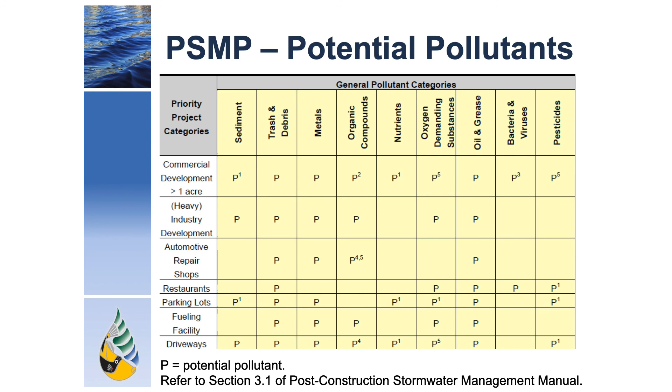The types of post-construction BMPs are divided into three categories. Low-impact development must be considered and evaluated first, followed by source-controlled BMPs, and if either are not feasible, treatment-controlled BMPs must be evaluated.

Low-impact development, or LID, involves retaining stormwater runoff on-site and viewing it as a resource rather than a waste. Some examples include preserving vegetated areas or collecting runoff from roofed areas to irrigate the vegetated areas.

The goal of source control is to prevent potential pollutants from contacting stormwater. This may include covering a maintenance area. Treatment controls attempt to remove potential pollutants from the runoff. These include BMPs like a hydrodynamic separator.

Designers could refer to the City and County of Honolulu's resources when developing the PSMP, in particular the BMP manual, guide, and rules relating to storm drainage standards, which are all available online. As a rule of thumb, volume-based BMPs must capture 1 inch of stormwater and flow-based BMPs must capture and treat 0.4 inches of rainfall per hour.

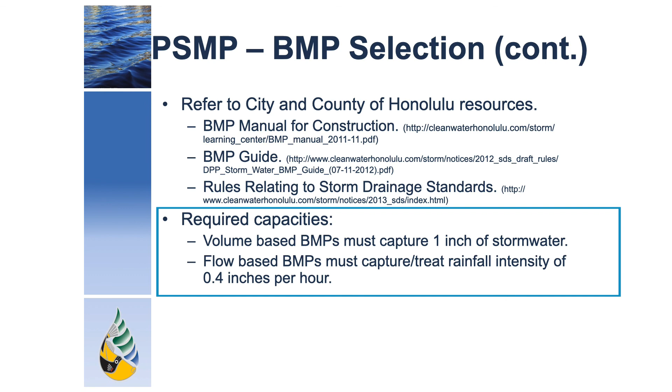The following are some common permanent BMPs that may be included in a construction project. The simplest one is to preserve vegetation and natural areas that already exist on a site. This BMP is only practical in areas where there is existing vegetation, and it should be marked off during construction.

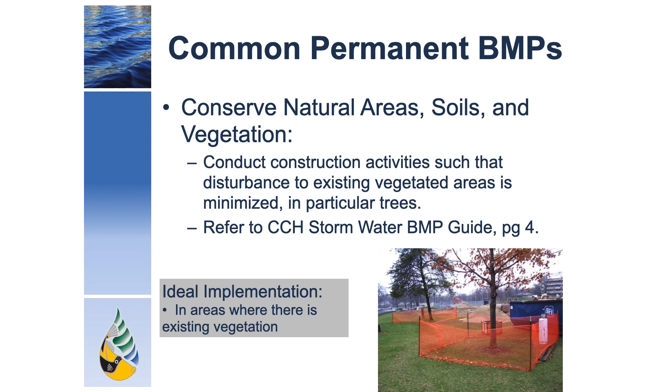Bioswales meet the objective of both retaining stormwater on site and providing treatment. A bioswale consists of a channel where stormwater is directed and permitted to infiltrate into the ground, thereby reducing the quantity of stormwater discharge. Additionally, vegetation in these channels can be effective at removing pollutants that may be present in the discharge. Bioswales are ideally placed along streets and parking lots, where stormwater needs to be drained from a paved area and can also support vegetation growth.

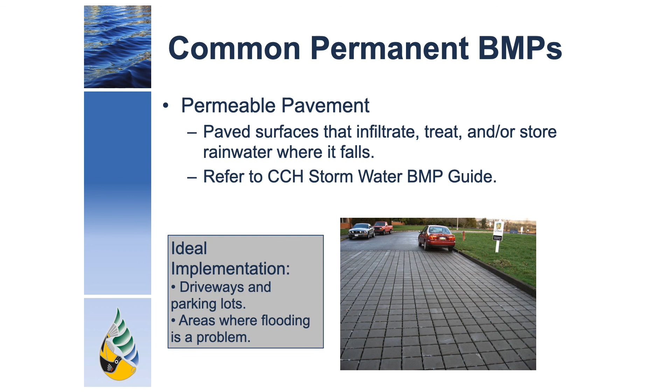Another BMP designed to retain stormwater on site is permeable pavement, which is designed to perform the same function that normal pavement does, but also allows the stormwater to infiltrate faster into the ground. This BMP is often used in paved areas, such as driveways and parking lots.

Hydrodynamic separators are designed to treat stormwater runoff as it leaves a site. As the discharge flows through the system, it allows for solids to settle out or float to the top and cleaner water to be discharged to the receiving water. These types of systems work well in areas where solid waste is expected, such as public areas and loading docks.

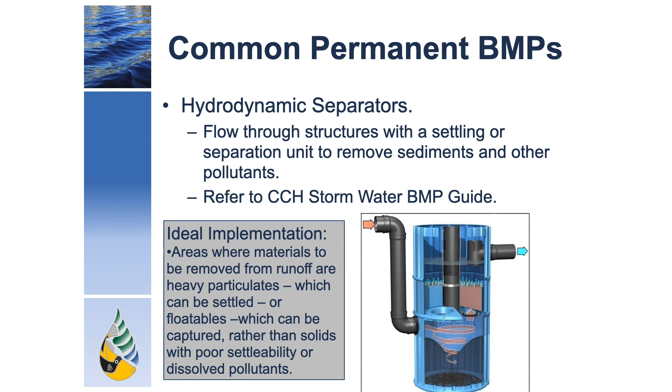Oil water separators are another option for stormwater treatment. Oil water separators are geared particularly towards the removal of petroleum hydrocarbon products. They are beneficial in areas where vehicle maintenance or fueling operations are expected to occur.

Harbors has instituted its stormwater management program to protect our state's waters and to achieve compliance with environmental regulations. This is now a standard business practice for construction and should be followed by all persons involved. In particular, please remember that all projects must be reviewed prior to start.

Projects that are of 1 acre or more must consider including a post-construction BMP. Inspections are required by the consent decree and NPDES permits and can be a great tool to identify problematic areas before they result in enforcement.

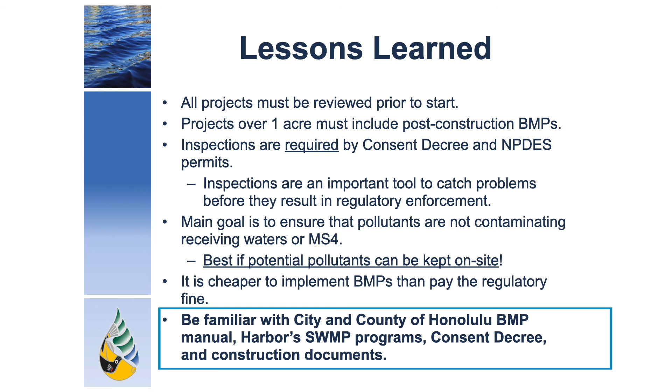Contractors should implement BMPs with the goals of keeping potential pollutants on site, preventing contamination of the receiving waters, and avoiding fines. All parties should be familiar with the City and County of Honolulu's BMP Manual for Construction, the harbor's SWMP, the consent decree requirements, and construction documents.